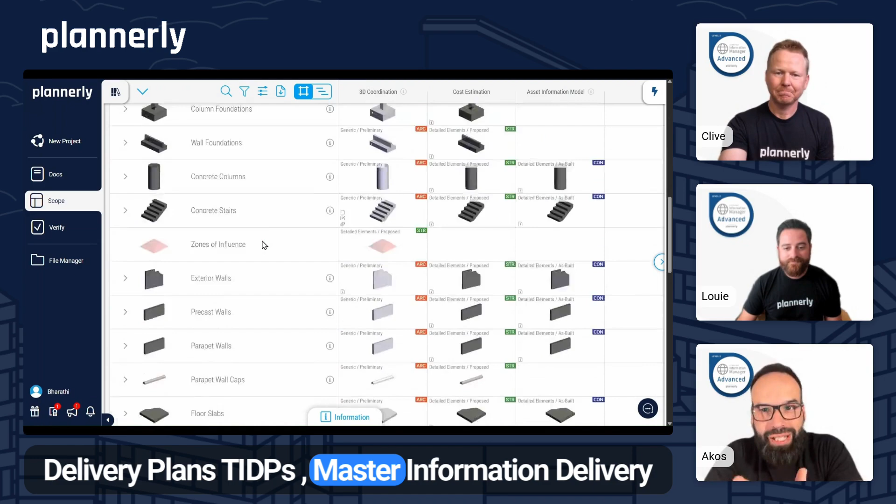This structure means you are not just recording data, you are clearly defining task information delivery plans, the TIDPs, master information delivery plans, MIDPs, responsibility matrices, level of information need expectations, asset information requirements, and so on.

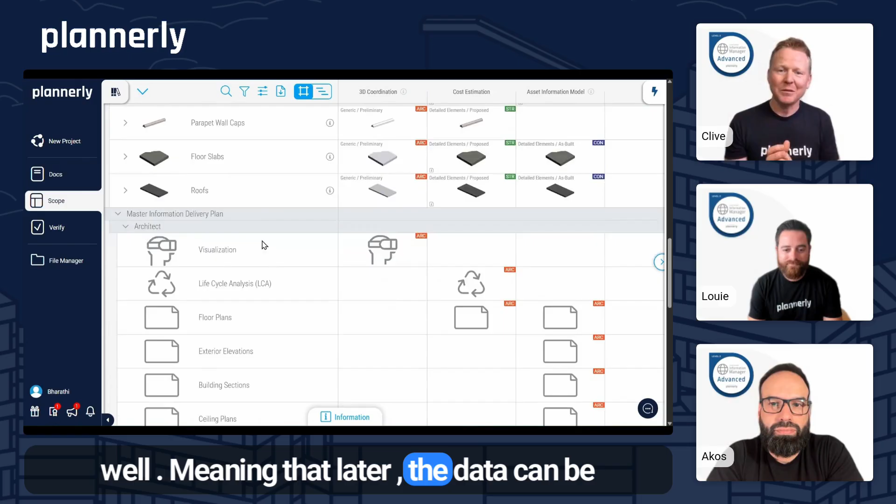Yep. And because the information is stored in a structured way, not only can humans read it when you see it in a grid form, like we see on the screen here, but also it can be exported in a machine readable format as well, meaning that later the data can be automatically used to create some of the deliverables and also for automated checking as well. Even the elements inside of model files and handovers against exactly what was detailed in the information requirements that are part of the contract. That whole workflow can be connected.

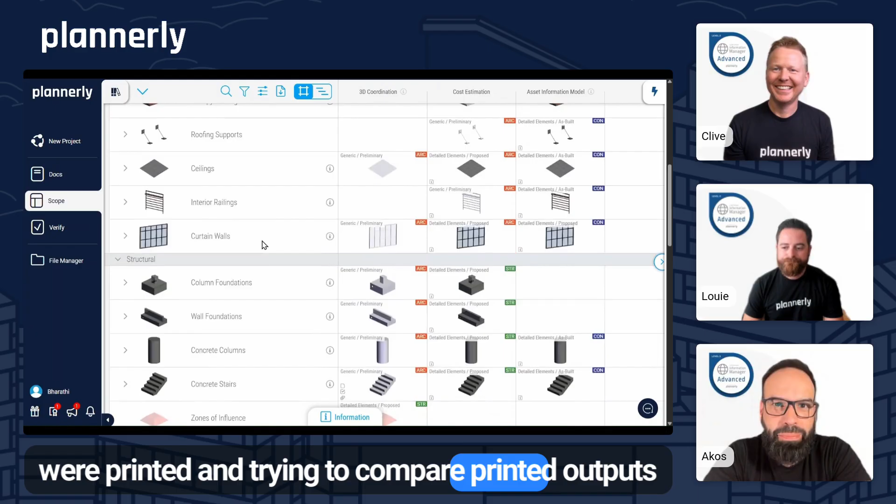Are you guys seeing a lot of time that teams are spending creating these and maybe manually checking? What have you seen in the past? Yeah, everything from having huge two screens. That's a typical setup for a BIM workstation, and trying to compare deliverable to Excel spreadsheet and trying to find out whether they match or not. But we even heard pretty recently, actually, that some of these spreadsheets were printed and trying to compare printed outputs to some deliverables. But when they introduced an automated system, they actually could save a headcount. They could reduce the team by not having to manually dig into those deliverables.

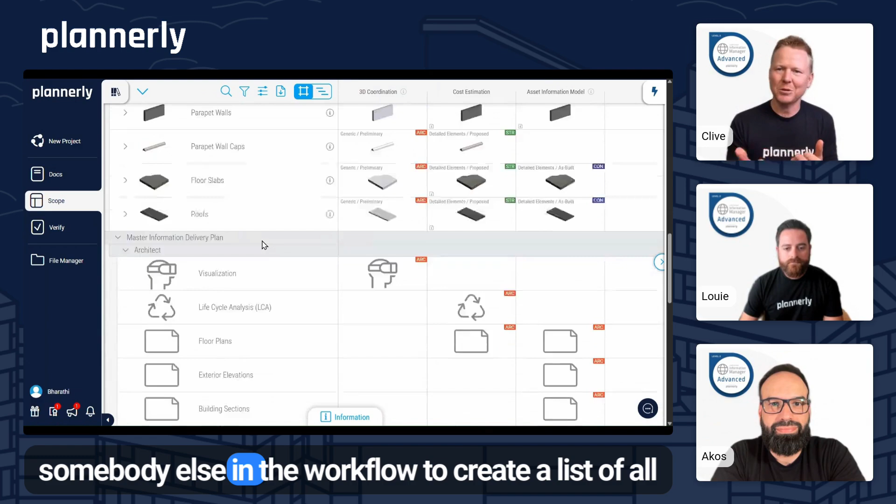Yeah, I think that one specifically, if they're in a database that teams can understand and use to create content, and then also autonomously check, meaning they're checking it before they're forcing somebody else in the workflow to create a list of all of the exceptions, all the issues, and share those. That process can save a bunch of time. And actually, on one of the projects, we heard that they removed the need for their quality assurance piece. There's a part of it. 3 people, I think it was, they reassigned to more dedicated, more productive tasks rather than the rework and QA and issue fixing, which is pretty cool to hear.

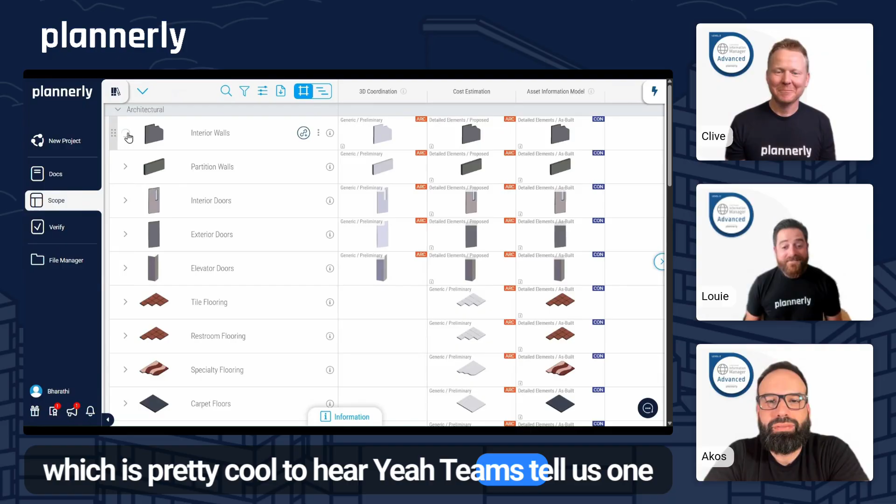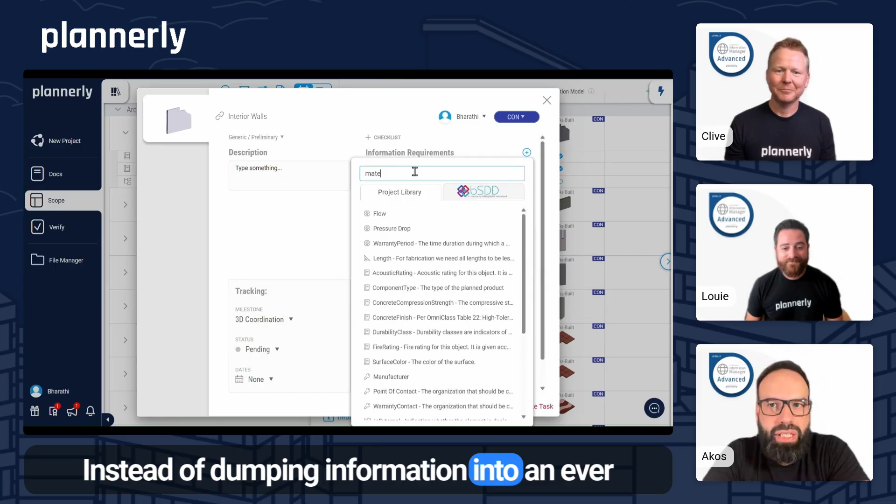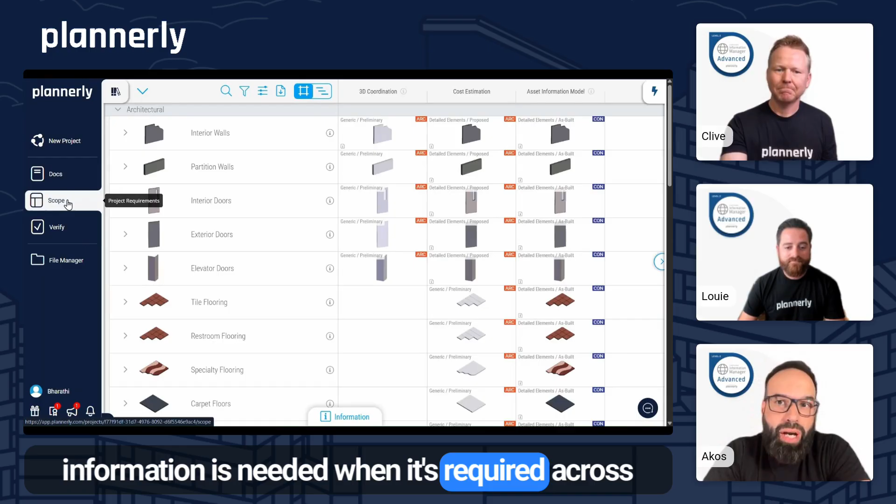Yeah, teams tell us one of the biggest breakthroughs is using a visual grid to show requirements. It's no longer a guessing game. Everyone can literally see what's needed, by when, and by whom. Instead of dumping information into an ever-growing spreadsheet with more columns, more rows, and less clarity, a visual layout changes everything. Teams can instantly grasp what kind of geometrical detail or information is needed, when it's required across project milestones, who is responsible for delivering it, and how much detail is expected at each stage.

Yep, spreadsheets are great for storing data, but terrible for building shared understanding. And a database with a smart interface transforms requirements from a raw set of information into a visual contract that everyone can go through, agree to, print into an Excel or a PDF, but also have in a machine readable way that can start to make the difference in downstream workflows. It's the difference between hoping people read a dense document and actually aligning a team on what they've committed to. The clarity isn't just helpful at the start, it also becomes the foundation for accountability later on down the line.

Visualized requirements create a single source of truth. So when it comes time to tracking deliverables or revisiting a milestone, there's no confusion. You're not chasing down emails or version 7 of a spreadsheet. You're reviewing the promises that were agreed up front. And that's why visual structured requirements lead to better collaboration, smoother contracting where everyone understands what they're signing up to, and therefore fewer surprises during the delivery.

We've seen it time and time again where people actually change their entire view when they see the project laid out visually. Instead of being dense text like a spreadsheet like this, we're actually seeing it so much better through this visual display. And we actually have had feedback from executives that have not really understood BIM or information management, and they are shying away from, and they're actually not taking part in the workflow until they see that visual grid, and suddenly things change for them. And we've had really positive feedback where teams are basically saying, now my executive really understands, they're backing what we're doing, and we're getting results from this.

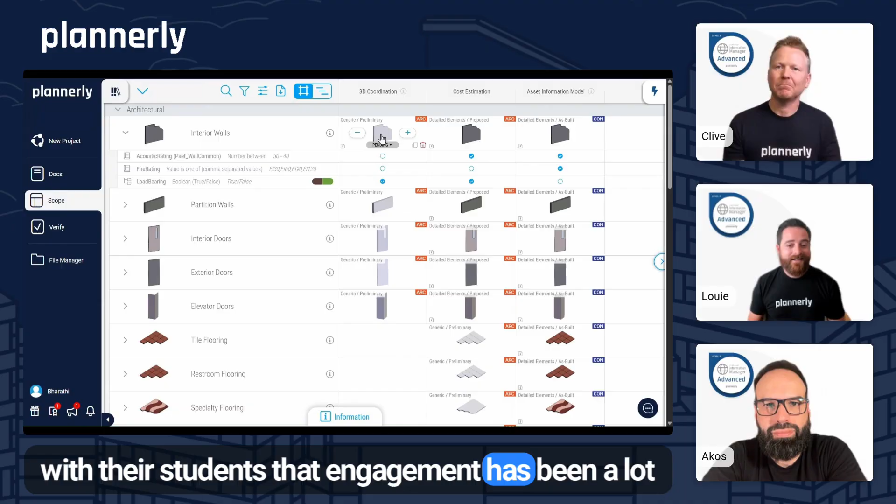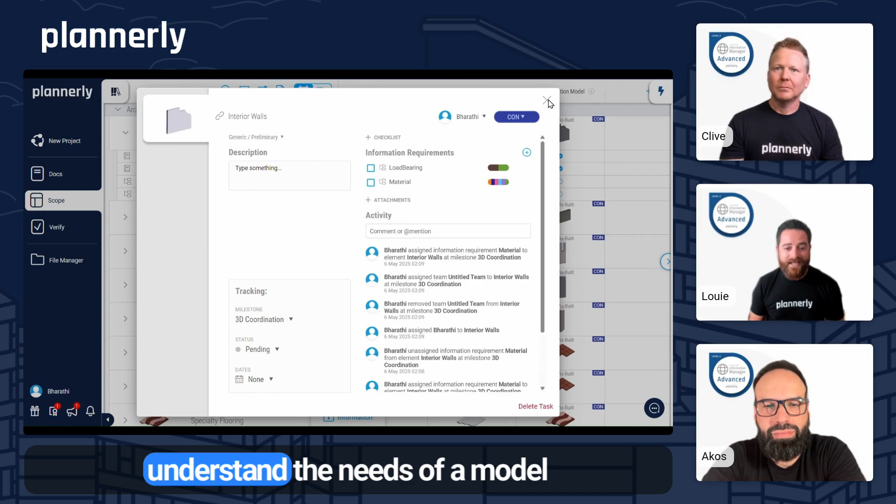What have you seen? Yeah, not just with consultants and client relationships, but professors with their students. That engagement has made it a lot easier to teach them what's needed in project information. A spreadsheet isn't something that's very visual, so this grid has really helped students understand the needs of a model. Yeah, and we shouldn't forget that this is creating collaborative deliverables and agreements in the first place, but all the teams around the table are on a different step on their journey in information management adoption, and having a visual grid really helps them understand and be on the same page on what is required, when it is required, who is responsible for that, and how it has to be delivered. So absolutely, we heard from teams that this visual nature is a great way to communicate the needs. Yep.

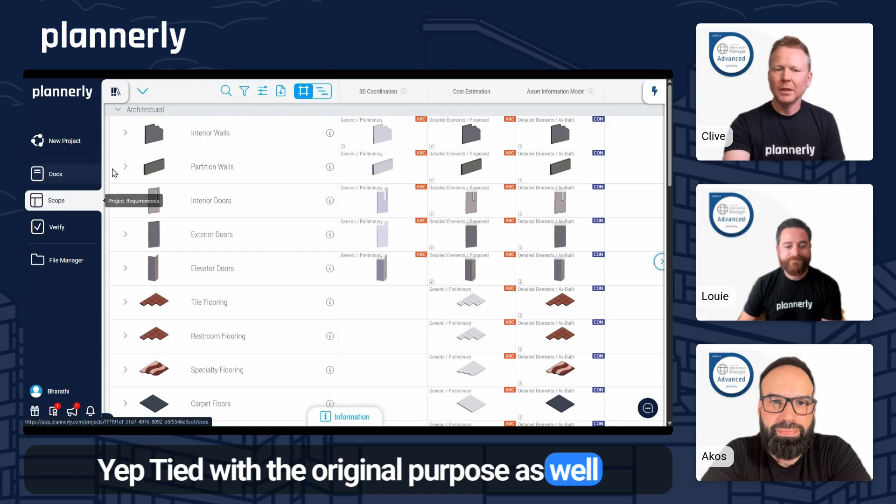Tied with the original purpose as well. Absolutely. So we've talked about the use of that visual grid. What about machine readable information? We talked briefly about this concept of information delivery specifications. Louie, how can we take that a bit further?

Yeah, just defining the requirements isn't enough if they can't be checked later very easily. Yep. That's why we recommend using the IDS from buildingSMART, the information delivery specification, which allows us to define the requirements in a human readable format in this beautiful visual spreadsheet that we just mentioned, but also output as a machine readable XML file that can be read by receiving applications for very many different use cases. Yep, exactly. So you get the best of both worlds.

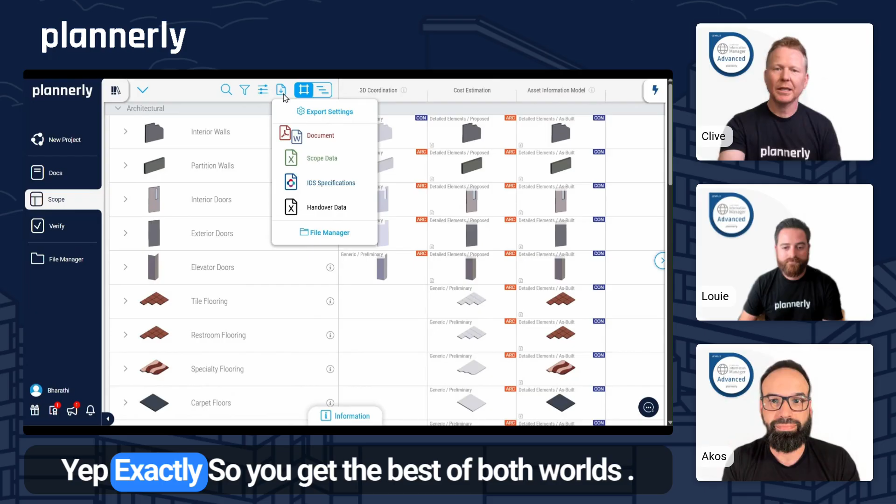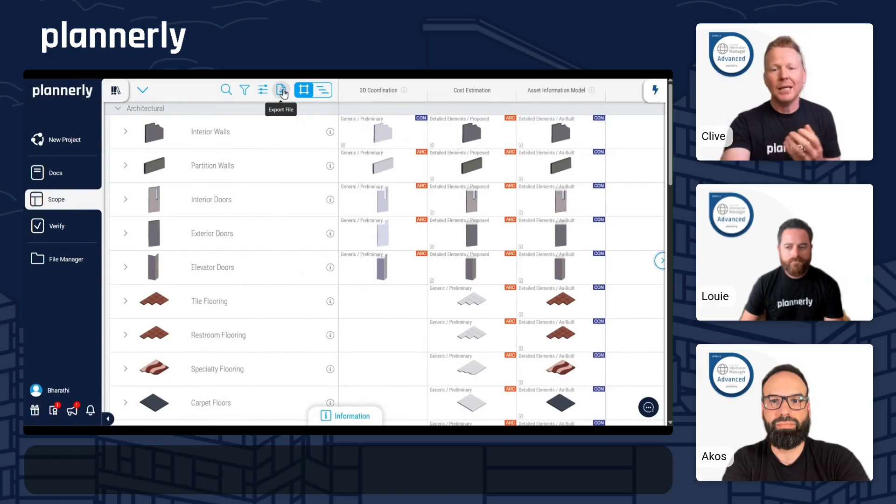And in this example, you can see the IDS file being created, which is, as Akos mentioned there, a machine readable format that allows you to define exactly what information must be delivered in a way that can be later automated for verification in any model deliverable, and really streamlines the workflow. We even have the ability to use that inside of modeling tools, like, for example, inside of Revit, where it will inject the exchange information requirements into the model as part of that workflow. What else do you see, Louie?

Yeah, you can define that all walls must have a fire rating value from a predefined list, or doors must have manufacturer and acoustic rating properties. Yep. And they're all captured in the human readable and machine readable forms. Right, and because IDS is a standard developed by buildingSMART, it's not locked to one software solution. You can connect your requirements to multiple authoring tools or checking platforms. Yep. By starting your project requirements with an IDS mindset, you're not just making requirements clear, but you're laying the foundation for automated, verifiable compliance later.

Why do you guys think that many people are missing out on this opportunity to automate the checking? Sure. I mean, in building information modeling, automated model checking has been around. It has a long history, but it rather has been a reactive process. You get a model, and using different tools or doing manual checking, you dig into it and try to understand what it contains. But the missing piece was that actually we don't communicate early enough in the project what we are expecting, what the use cases are going to be.

Therefore, it's a huge amount of data that you have to dig into and try to reverse engineer what it can be used for. So automating the model checking now is turning into a proactive process when you first define in a visual way, collaboratively with your stakeholders around the table, what is needed, how it is going to be used. And after that, using the IDS approach is really a piece of cake. It's a dream to check these models automatically and validate the deliverables.